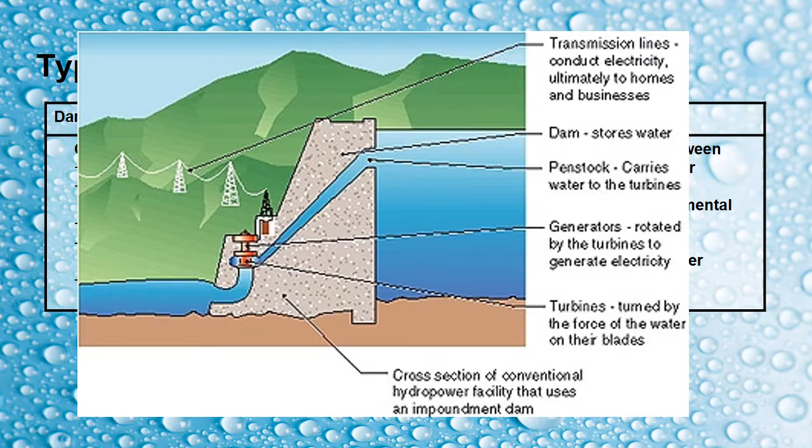Dammed hydropower is what most people picture when they hear the term hydropower, a dam across a river. The benefits of this type of hydropower are that it works on many scales, and the power generated can be increased with demand by letting more water flow. The downside of this method is its large impact on the environment and the risk associated with holding back so much water. Run-of-river is the most environmentally friendly type of hydropower.

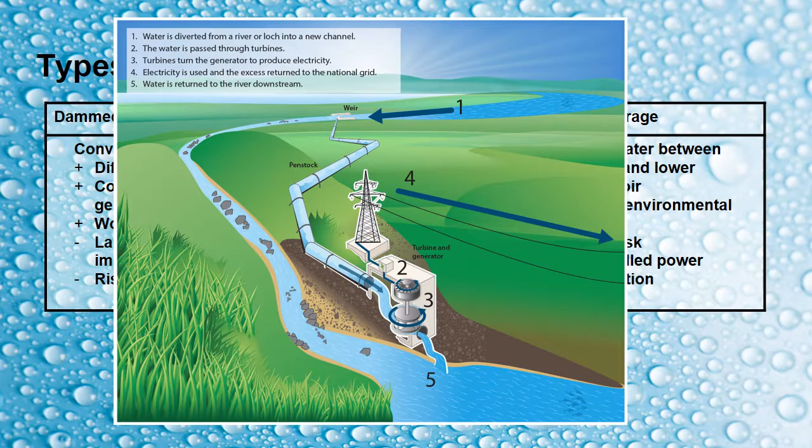It does not dam a river, but instead diverts a portion of the flow to a turbine and uses the natural flow rate of the river to generate electricity. The downside of this technology is that the amount of power generated can't be controlled since the river isn't controlled. Pumped storage hydropower is the last type of hydropower. This method involves two reservoirs separated by a dam with a turbine.

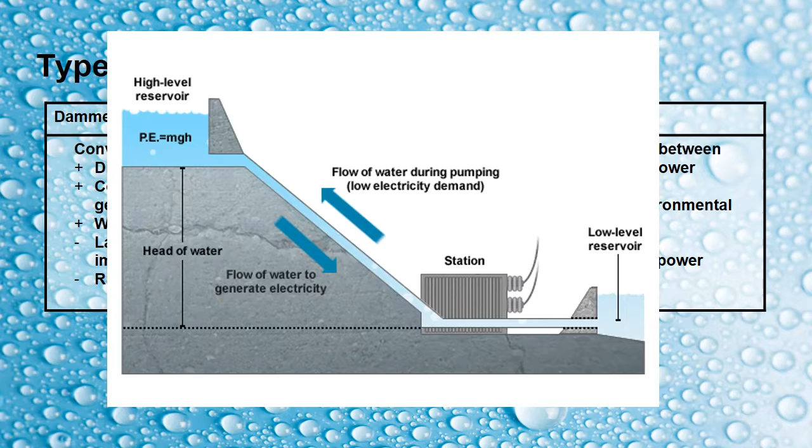When power is needed throughout the day, water is allowed to flow from the upper reservoir down to the lower reservoir through the turbine, causing it to spin and generating electricity. When power is not needed and the cost of electricity is low, the turbine is spun backward, powered by that cheap electricity, so it acts as a pump, returning the water back to the upper reservoir where it can be used again. This technology has a balance of benefits and pitfalls. It has a lower environmental impact and also controlled power generation.

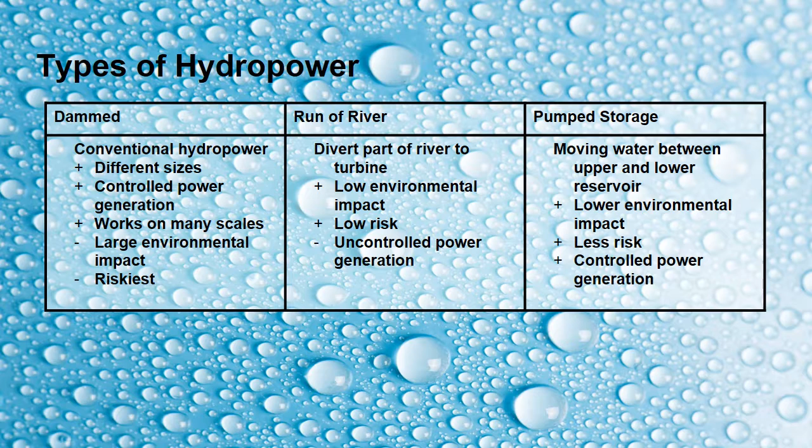There are three different types of turbines used in hydroelectric power generation. The type of turbine used is based on the amount of electricity being generated. The Pelton turbine is used for applications of up to 200 megawatts, where there is a large difference in height. This design consists of specially shaped buckets on a disc that fill with water to spin.

Kaplan turbines are used in electricity generation of up to 400 megawatts. This turbine looks like a boat propeller with 3 to 6 blades that can be pitched differently for higher performance. The Francis turbine is used for generating up to 800 megawatts of electricity. This turbine is unlike the other two in that it uses radial flow.

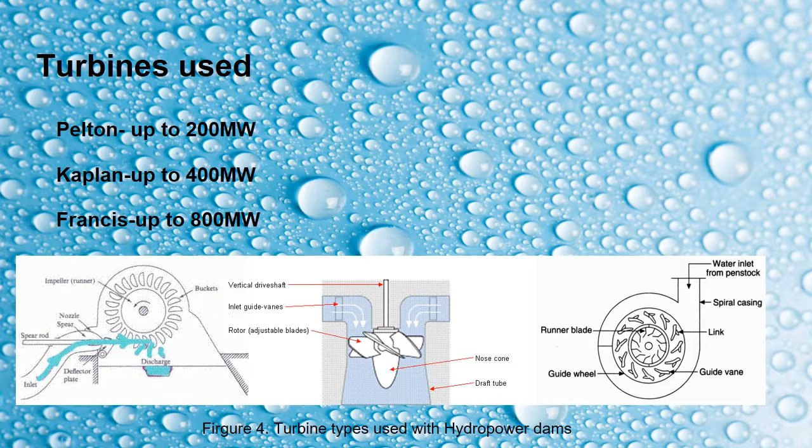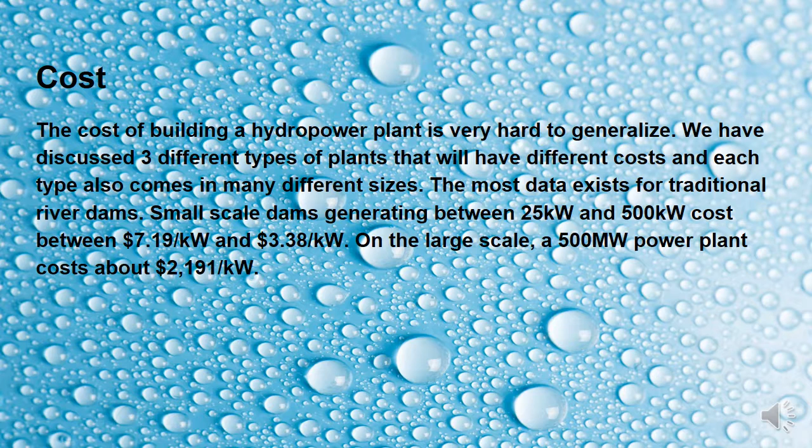The cost of building a hydropower plant is very hard to generalize. We have discussed 3 different types of plants that will have different costs, and each type also comes in many different sizes. The most data exists for traditional river dams. Small-scale dams generating between 25 kilowatts and 500 kilowatts cost between $7.19 per kilowatt to build and $3.38 per kilowatt. On the large scale, a 500 megawatt power plant costs about $2,191 per kilowatt to build.

Our goal is to power Ohio University using hydropower. According to the school's energy dashboard, OU uses about 20 megawatts of electricity per day, so that was our generation goal. When we looked for ways to power OU, we first looked at our local water sources. The Hocking River is what first came to mind, but after a few calculations, we determined it was not a feasible source. We then looked to Dow Lake. We decided we could create a lower reservoir, put a turbine in the existing dam, and create a pumped storage hydropower plant.

Ohio University uses a max of 20,000 kilowatts at one time. Using the theoretical power available from the falling water, where P is the theoretical power, rho is the density of water, Q is the water flow rate, g is the acceleration of gravity, and H is the head, we've calculated with a 90% efficiency 20,861 kilowatts. This is sufficient to supply Ohio University during peak demands.

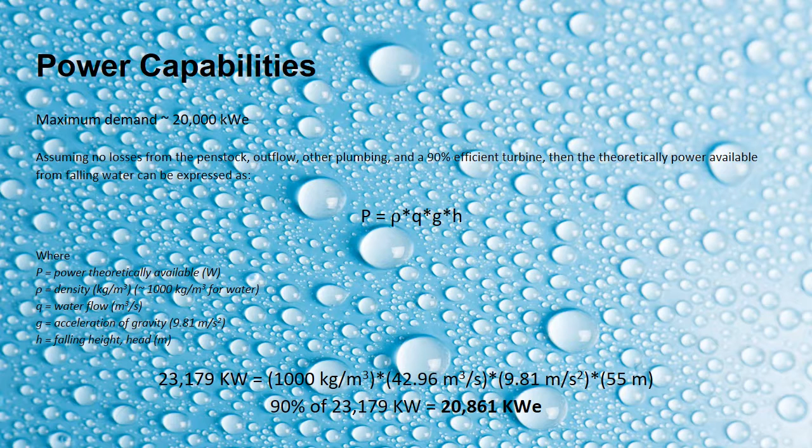The capital cost for this project is somewhat low. Dow Lake Dam has been in existence since 1960. Therefore, the site preparation to retrofit the dam is only $2.2 million. The Pelton turbine and generator are quoted from an online resource. The power line calculation is based on the 6 miles from Dow Lake Dam to Ohio University and the price per mile.

The pumping station is compared to a larger pumping station in Louisiana. We took the percentage of water we are pumping compared to the percentage of the water the larger station is pumping and came out with a cost of $31.5 million. The auxiliary systems include the hardware and software needed to operate and maintain the dam. The personnel cost is also included, which includes salary and the benefits. The total cost for this project would be $334.13 million.

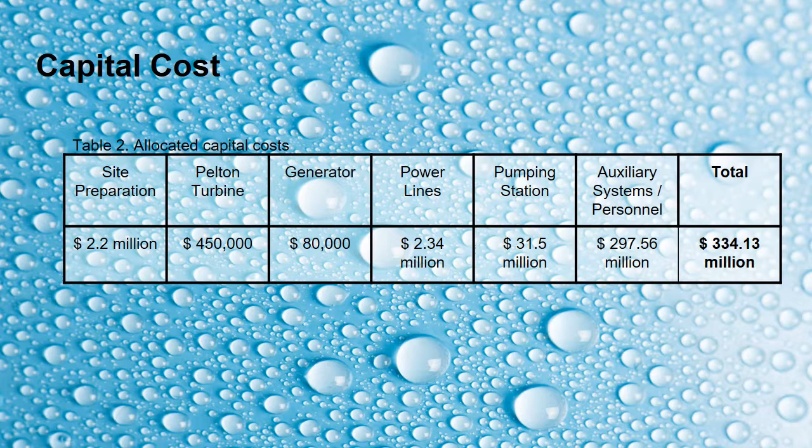There are many risks associated with this type of project. We're going to look at the top 3 risks that threaten the integrity of the dam. The natural risk, such as flooding, landslides, high winds, and earthquakes, can damage the integrity of the dam. From an operations standpoint, improper maintenance and failure to open or close valves during high flow periods can also damage the integrity of the dam.

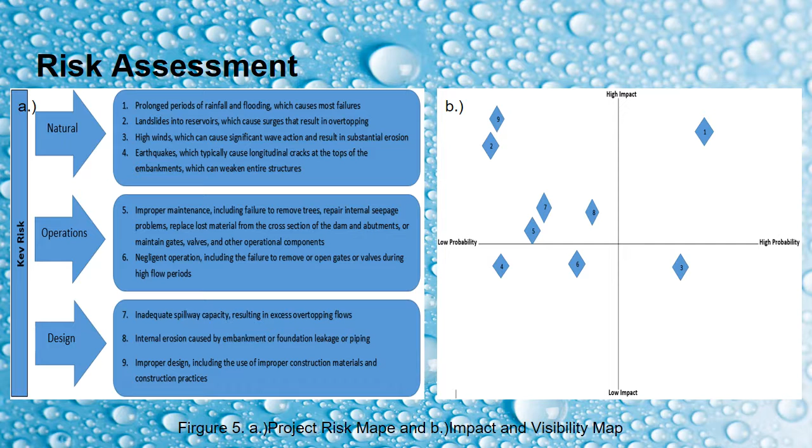The management of this hydroelectric power plant has many responsibilities. To name a few, we have plant control, authority and environmental regulations, forecast, optimization, and interfaces. All of these need to be followed, monitored, and take proper planning to ensure that the plant maintains its operating efficiency and meets the demand for Ohio University.

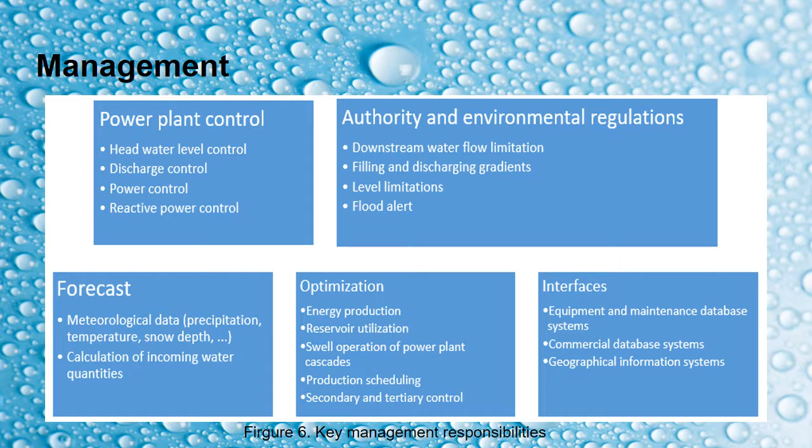Next, we are going to talk about policies pertaining to hydropower. The Department of Energy Organization Act, 1977, created the Federal Energy Regulatory Commission. FERC is responsible for issuing licenses and permits and performing inspections for all hydropower projects in the United States. Prior to issuing these licenses for hydropower projects, the environmental impact and economic benefits must be equally considered.

Ohio Revised Code defines dam safety laws for the state of Ohio. Ohio Department of Natural Resources regulates administrative rules and supplements laws defined in ORC. Construction and alterations to existing dams requires a detailed plan to be submitted to the Chief of the Division of Water of the ODNR. Prior to altering the Dow Lake Dam, the effects on wildlife, fish, and public safety must be considered equally with the benefits of installing a hydropower system.

Both the FERC and ODNR require periodic inspections of the dam to ensure the dam is operating safely. The ORC requires a detailed manual of dam operation, maintenance, inspection, and emergency protocol for Class 1 dams.

Looking at the initial capital costs, estimated current costs to power Ohio University, and the cost of operating the dam, which is primarily the cost to maintain the dam, we can determine the payback time. The calculated payback time is 16 years. After 16 years has passed, the total savings is $20.8 million per year. This estimation does not take into consideration any unexpected or emergency repair costs, but hypothetically the dam could be expected to operate with this amount of return indefinitely.